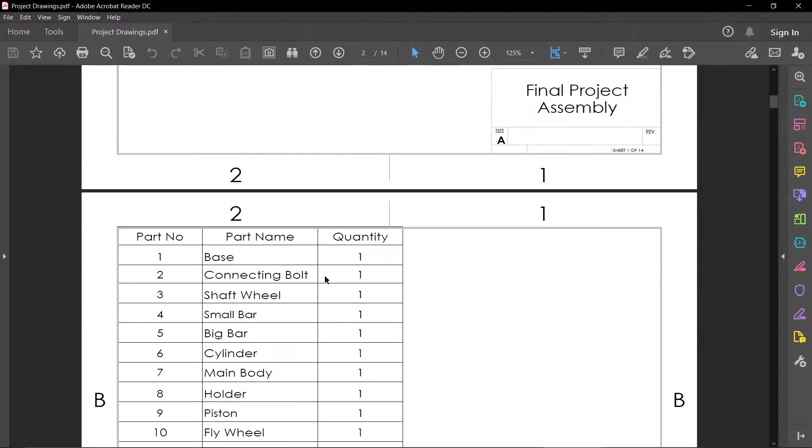As you can see, this is the air piston cylinder, all assembled here. We will assemble this solid model. In this video we will make only the base part, shown here. You can see this is a square shape, and all the dimensions are in inch-pound-second, IPS system. You have seen here 2.875.

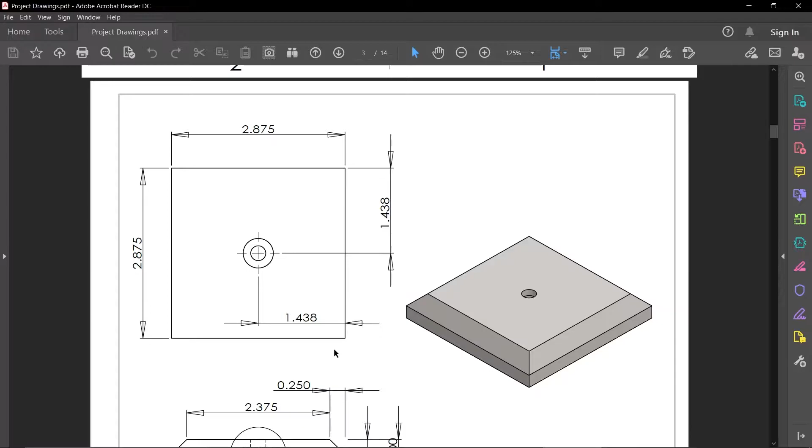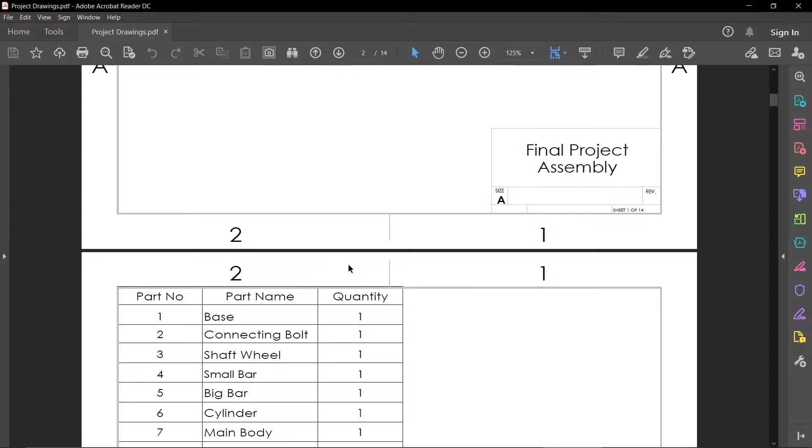So we will cut here, cut the material, and inside this plane also we will cut. In this video we will make only the base part. After the next video we will make the connecting bolt, then cover all this part, and after the final step we will make an assembly like this.

So let's dive into SolidWorks.

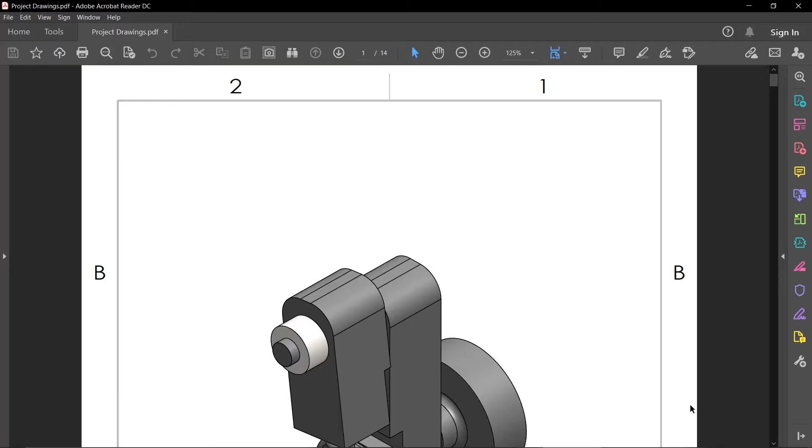So we are here in SolidWorks. You can see the canvas, and this is the design tree, and this is the command bar. We have a lot of features here: extruded cut, revolve boss, swept, loft. We have lots of features here.

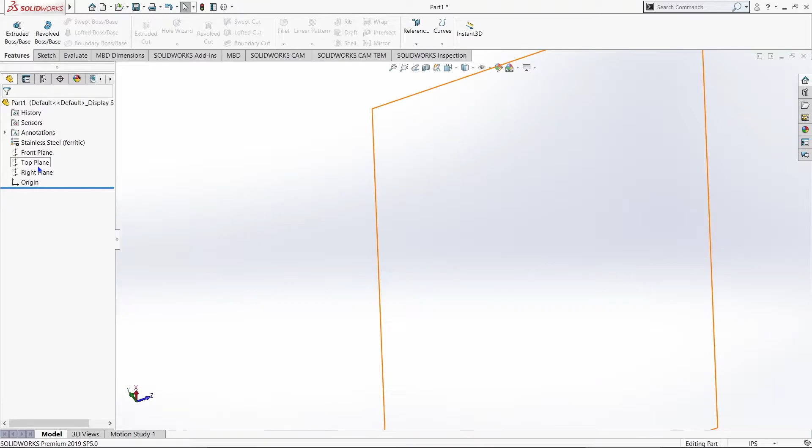Now I'm going to make the base part for assembling the air piston cylinder. So just go to the design tree, choose any plane. I will choose this top plane, and sketch this.

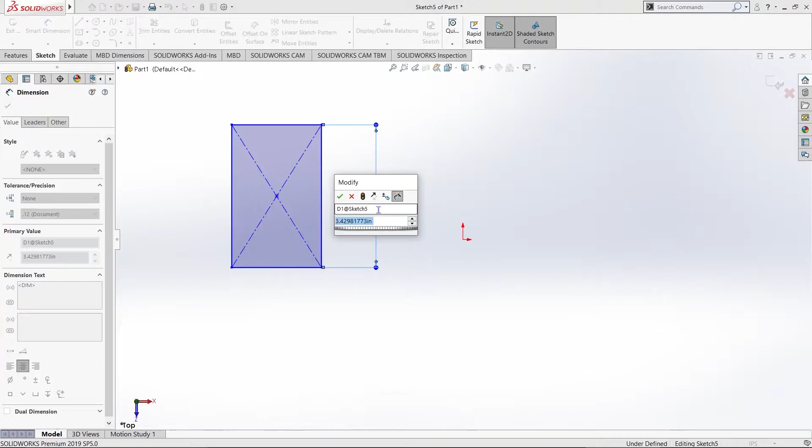This is correct, IPS. Take a center rectangle and dimension this. This is about 2.875, and this is also 2.875.

You can see here the sketch is not fully defined. Just click the center rectangle here, and this origin, and make it coincident. Now you can see our sketch is fully defined.

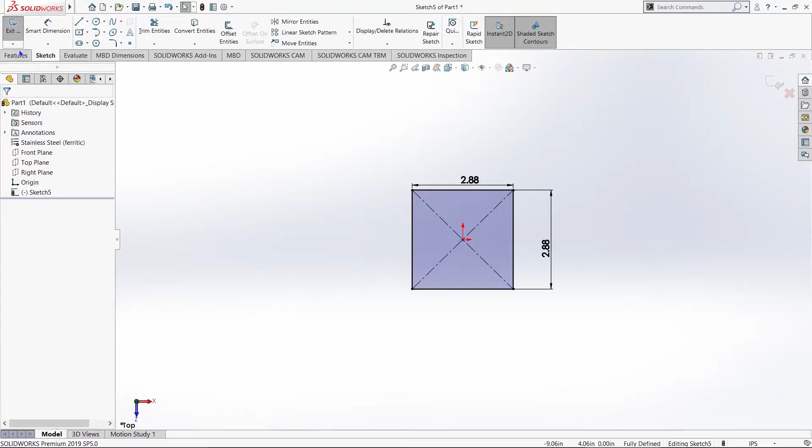Now we will go to the feature and extruded boss command. Just click it, and we want this bar to be 0.50 thickness. Click OK, and you can see here our bar has been created.

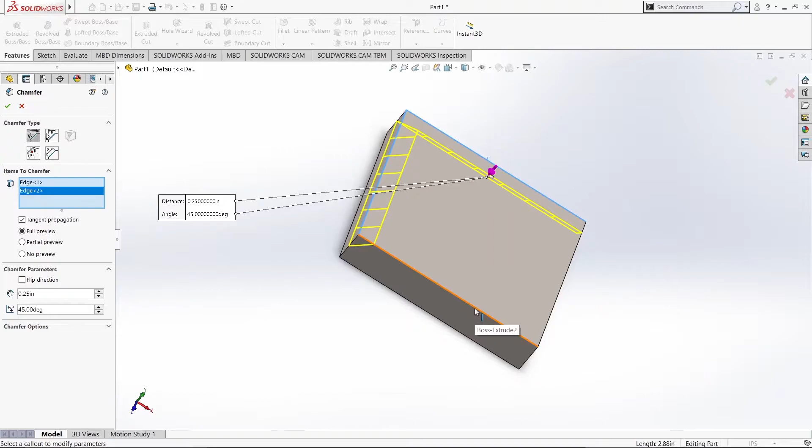Now I want to go for the chamfer. So down by the fillet you can see the chamfer. I want the chamfer on this edge, this edge, this edge, and this edge. So the shortcut trick is that if you want to chamfer all the edges, just click on the face, and you can see here that all the chamfers have been created.

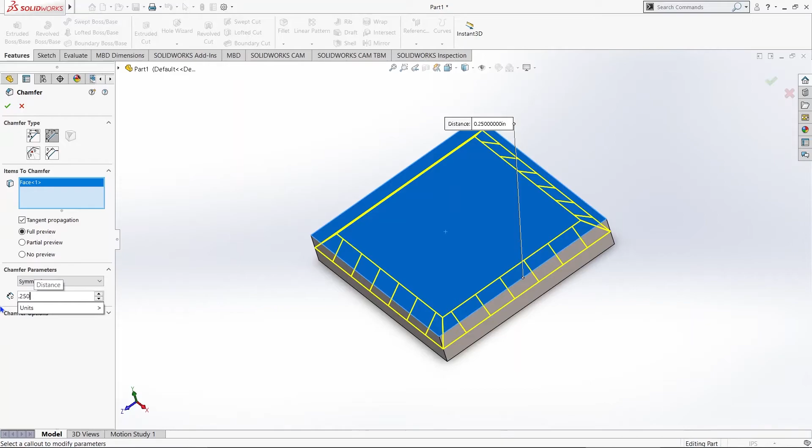So I want the chamfer to be 0.250. Click OK. You can see the chamfer has been created here, and now I want to cut a piece of material.

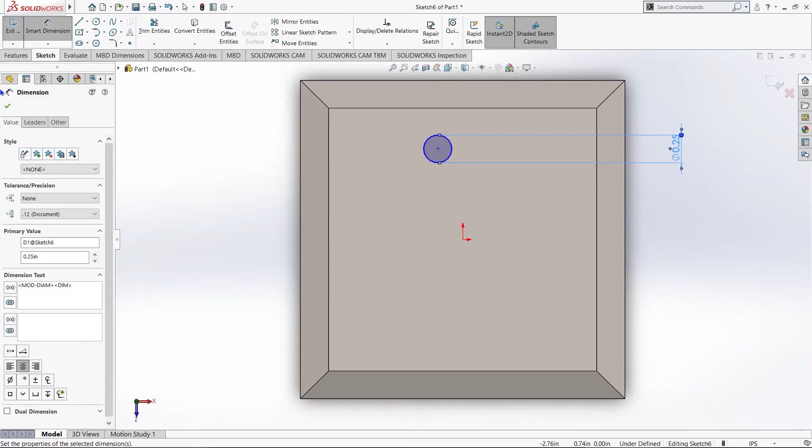Choose this plane and click sketch, make the normal view, take a circle and dimension this circle to be about 0.25. And from this center to this edge is about

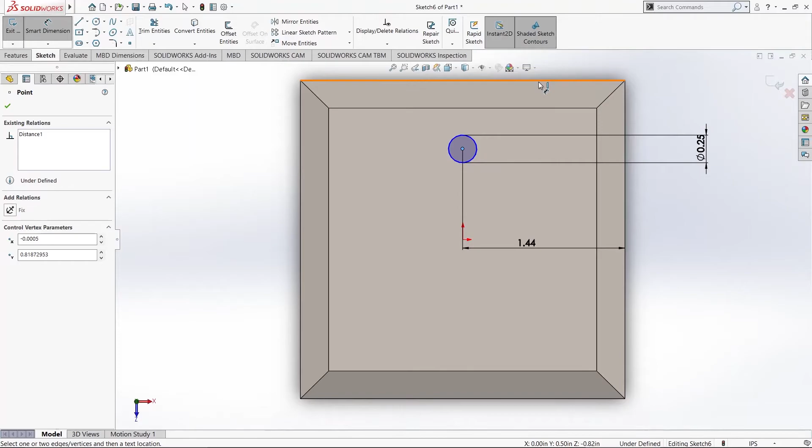1.438. Sorry guys for the background noise coming in. And again, this center to this is about 1.438. Okay, and now we will use the extruded cut here.

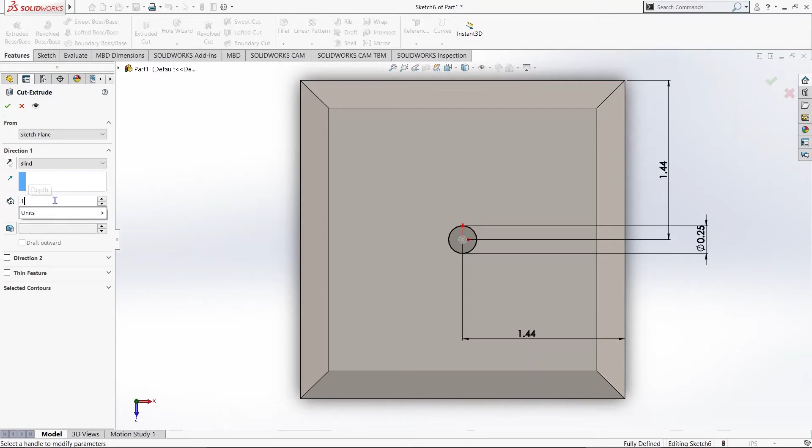Cut this, about 0.125 deep. Just hit OK. So you can see the material has been cut off from this face.

Now again we have to cut from this face. Click on sketch, make a normal view, take a circle, and dimension this circle to be about 0.5.

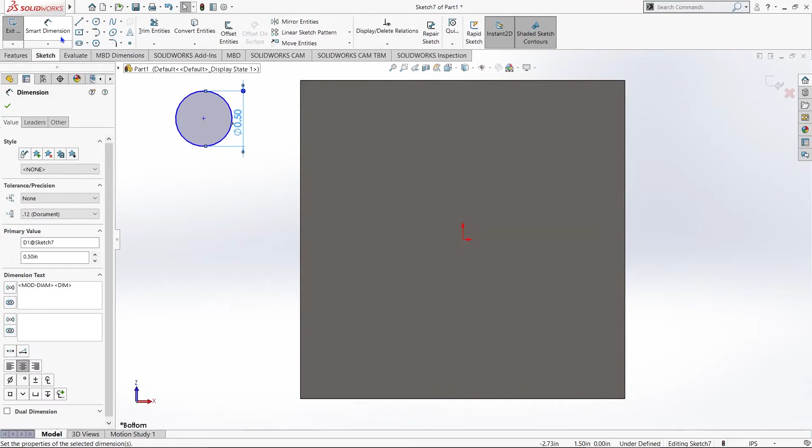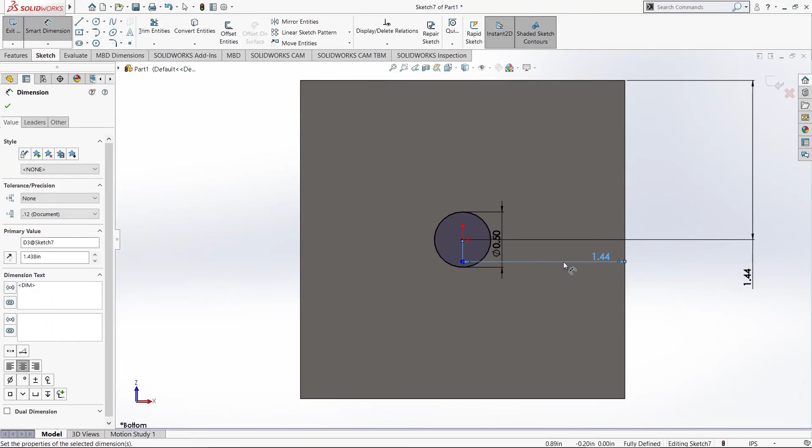Again, from this center to this edge is about 1.438, and again from this center to this edge is about 1.438. So this is done here.

Now I want to use the extruded cut here. We want to cut up to this surface. I want to choose this surface to cut up to.

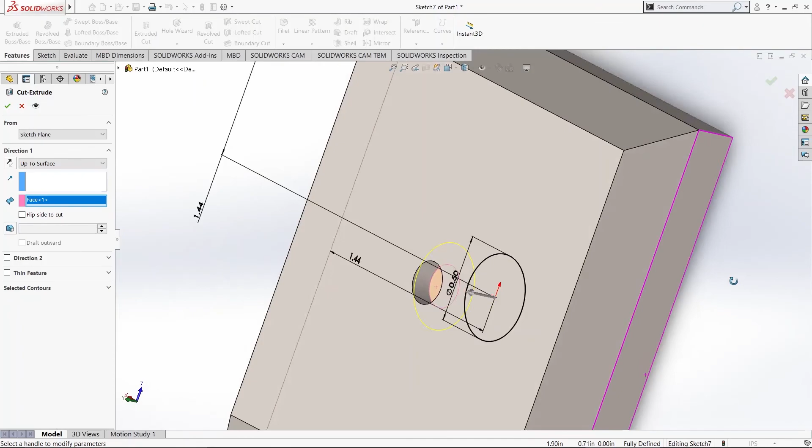You can see in the PDF file, which I will upload in the description box. So you can see here our base part has been generated in the canvas. Next video I will go for the next part.